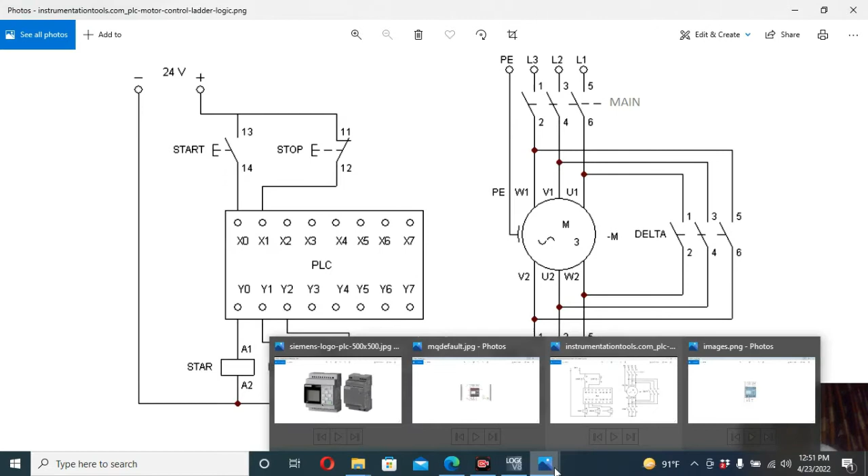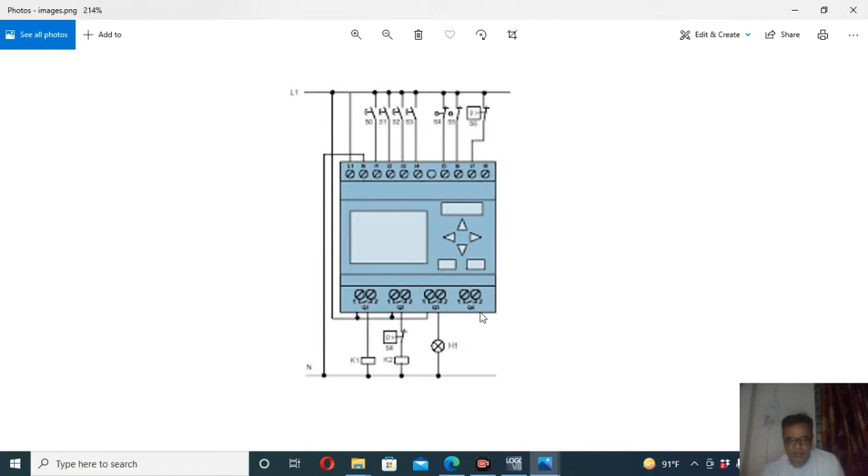These are all connecting with the common terminal and connected to the phase. And the same way for the output relay Q1, Q2, Q3, here the neutrals are all connected as common, and phases are all connected as a common to the phase supply, and all the neutral terminals that are coming here are going to the main neutral point. So this is the wiring diagram, and if I make some hardware video for the connection, you can directly watch how the hardware connection can be made.

So there are some diagrams like the previous screens. Here you see this is the PLC, and these are the inputs and the outputs, and this is the phase, neutral, this is the start, stop, the same way like the previous one, and this is the star-delta starter general arrangement. This is the motor, this is the main contact, this is the star contact, and this is the delta contact. So all the output that is coming from the PLC will be through the relay, and from the relay output it will be connected to the star contact, delta contact and the main contact, like this.

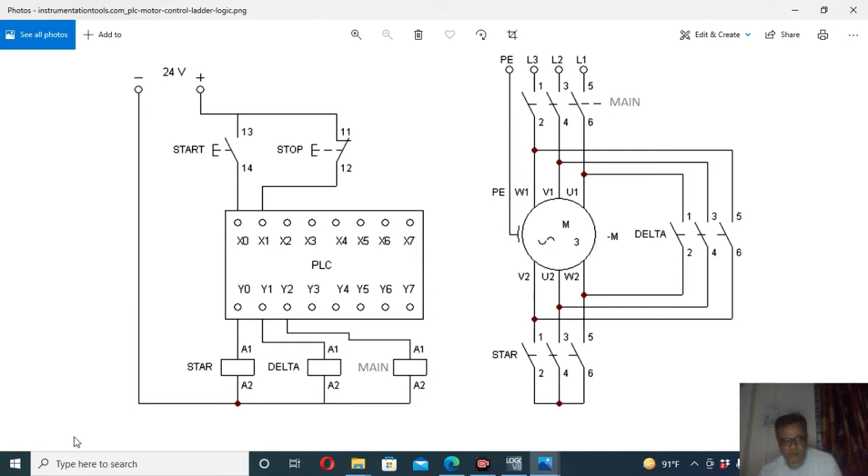So now we can watch the LOGO!Soft Siemens PLC software, and the procedure how to make the ladder diagram. The LOGO!Soft Siemens PLC, and here you see this is the title bar, and all the controls on the left hand side are displaying, like make contact, break contact, analog contact, relay coil, inverted output, and the timer, on delay, off delay, on off delay, retentive on delay, wiping. So these are all functions that are useful for the ladder diagram. They are all available here. So step by step we will use these in the ladder diagram.

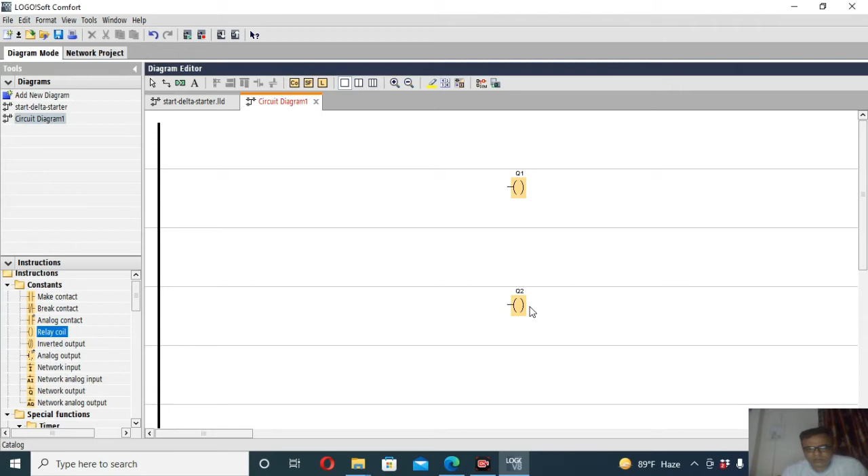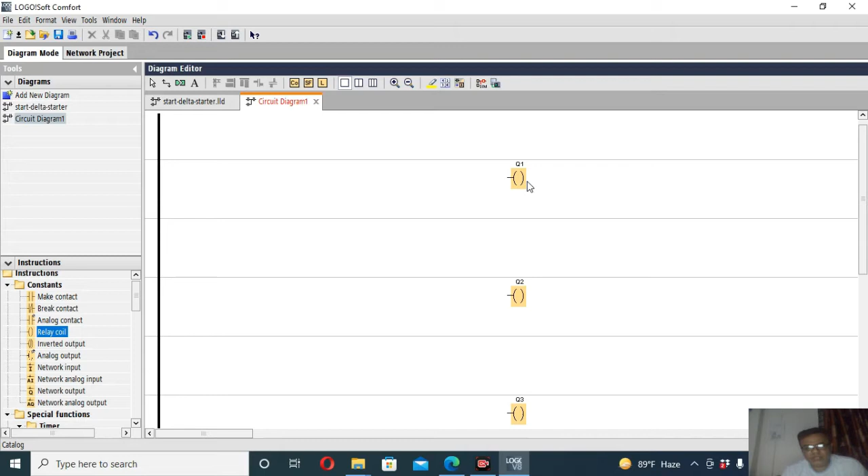So first of all, we start by relay coil. This is Q1, and another relay coil Q2, another relay coil Q3. So as in our previous discussion, we have already seen that we are using three contacts, Q1, Q2, Q3. I mean the relay coil for Q1, Q2 and Q3. These are for three main contacts, that is main contact, star contact and delta contact.

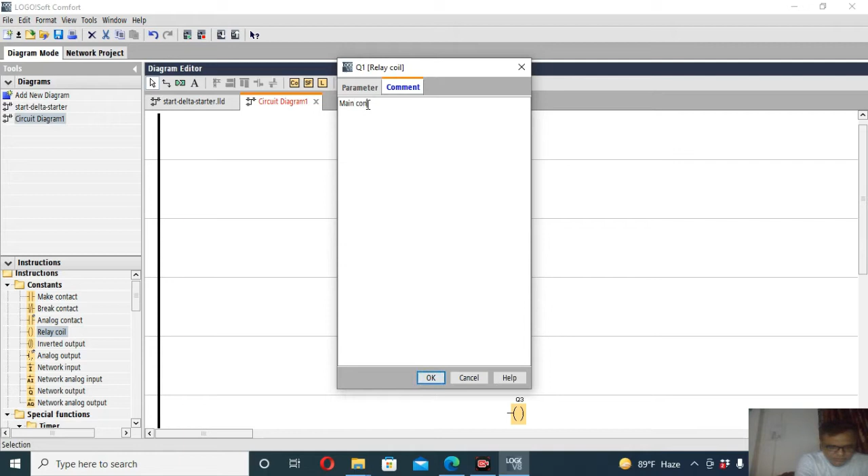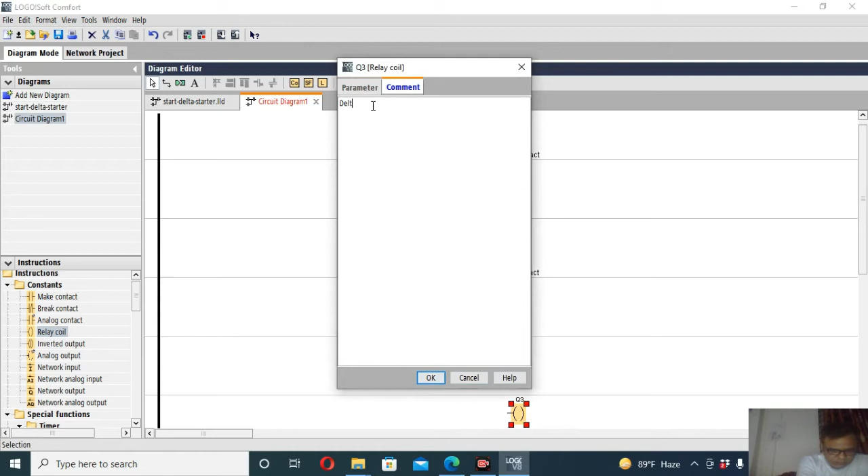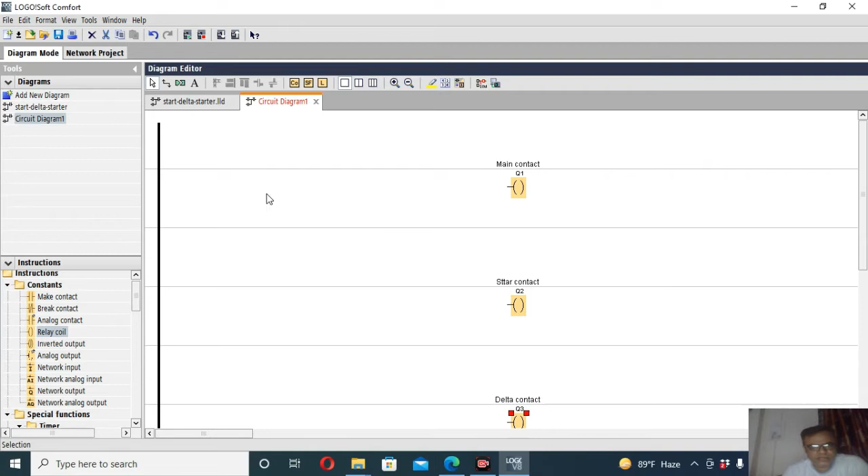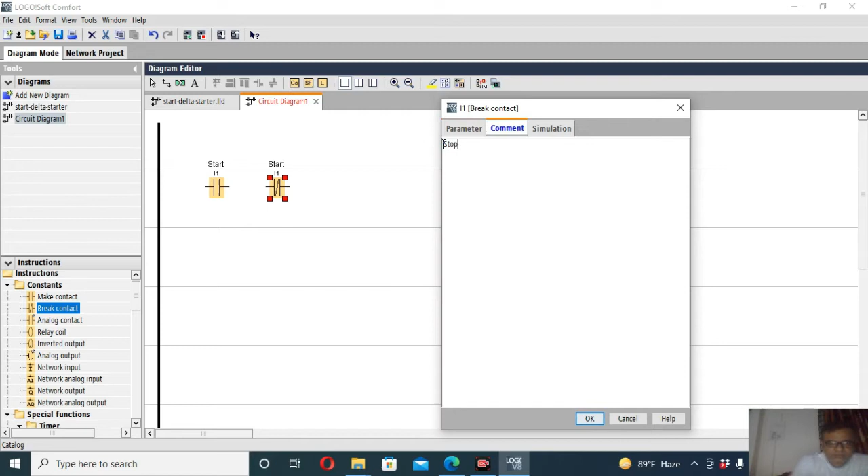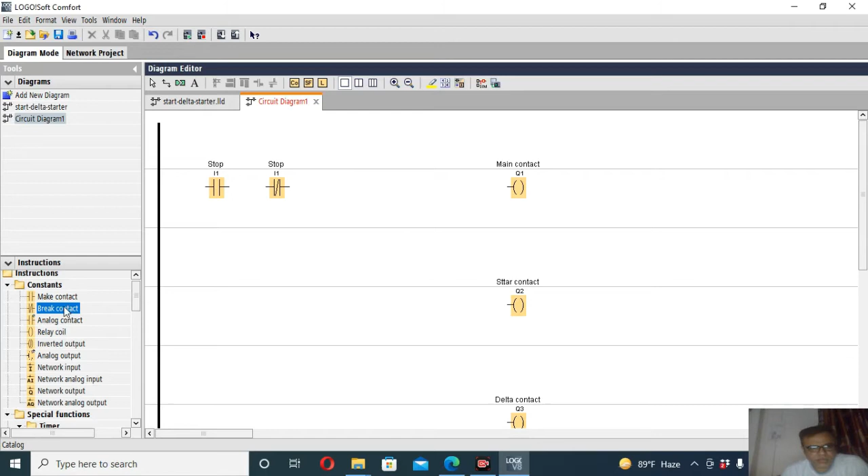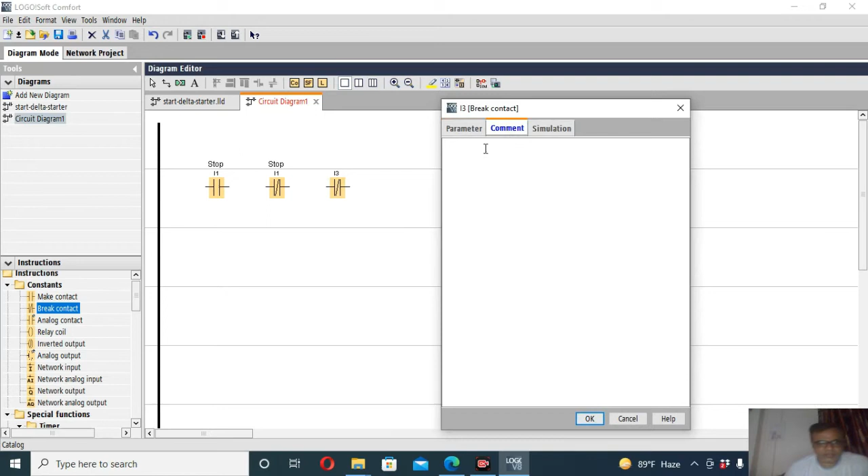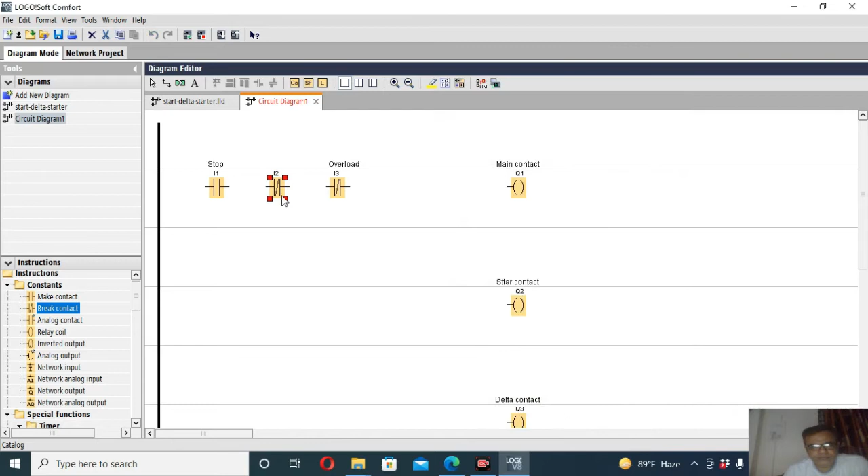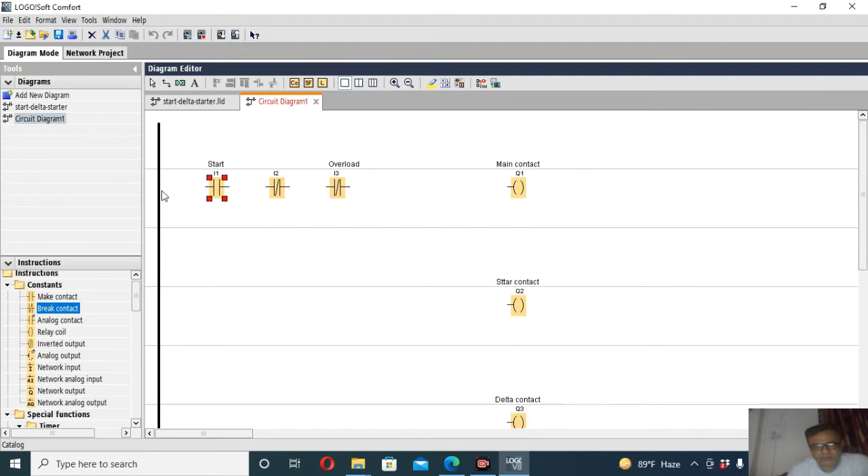So another contact can be used for overload. You can use another break contact. So you can make I3 and give name as overload. Sorry, this one should be I2, and this should be, oh sorry, the name is spelled in reverse. This one should be start button. This one should be stop.

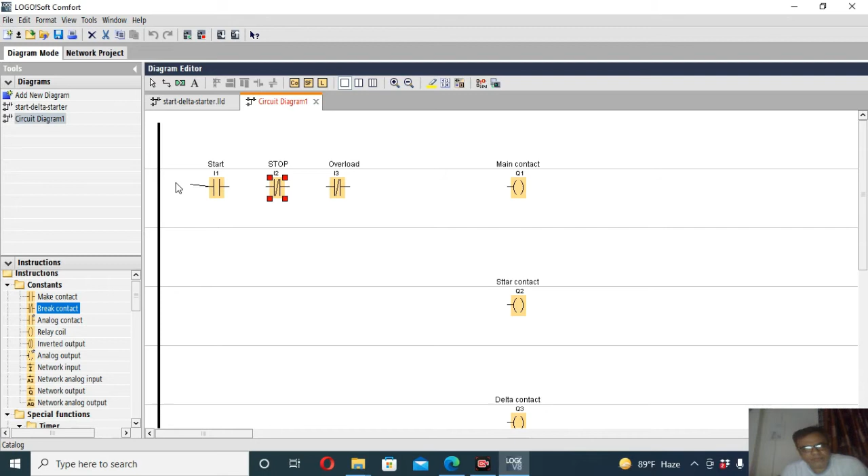So now we can take the line like this, like this, like this, and here, as this is a push button switch, if you press this contact, then momentarily it will be on, and then it will be off. And for the continuation of this contact, we have to make some latching circuit.

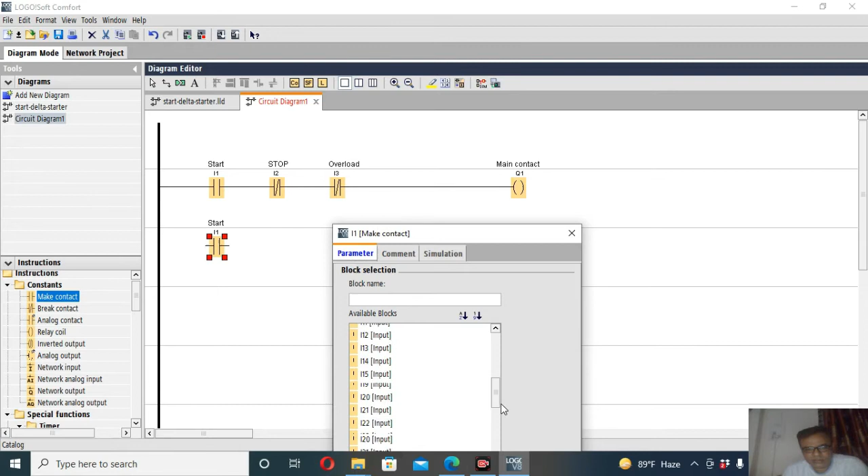So you have to take another make contact, and this is for this Q1 relay. So you have to select the make contact from the list. You see here Q1 relay coil. Okay.

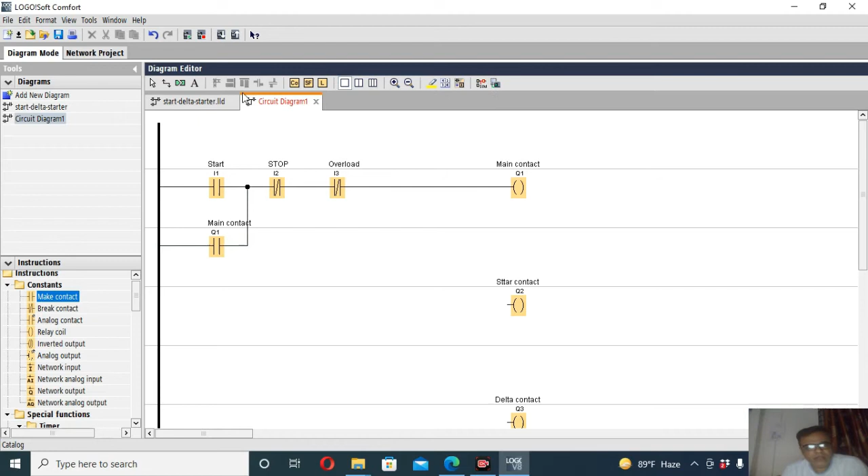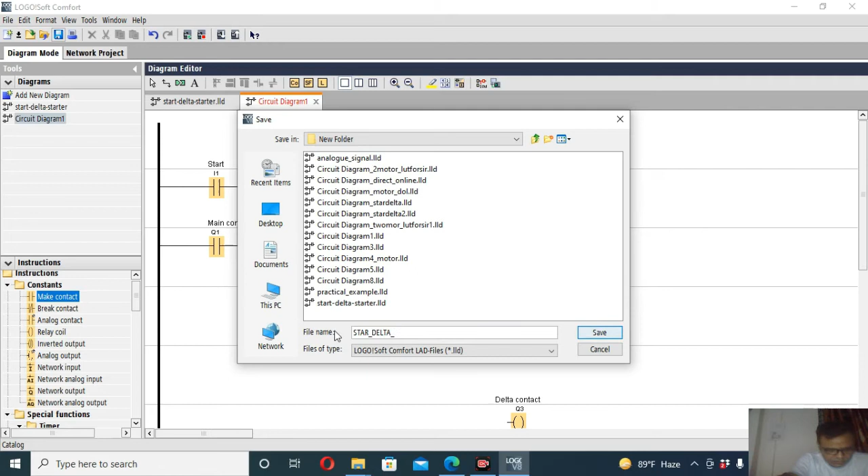So here one rung is already completed, so we can save this one and give one name as star delta logo. Then it is saved already.

So if we want to simulate this particular rung, then you can go for simulation. So this is my start button. If I press this one, I1, then you see here this main contact is already on, so this lamp is glowing. So now we have to go for another rung for the star, and another rung for the delta, like this. So this is the stop one. So if I push this one, the contact is already off.

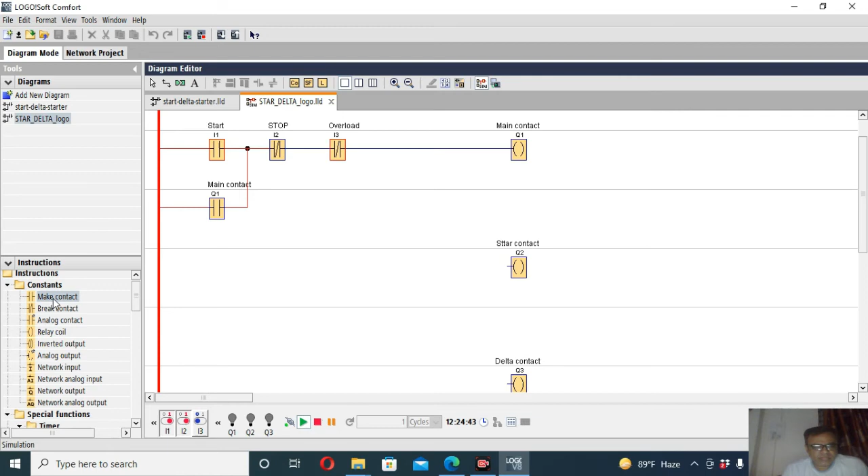So when my main contact is already running, then from the main contact we have to take one NO contact. So we have to take another make contact from here. And when the star contact is on, then obviously the delta contact can never start. So we have to take another NC contact for delta. So we have to take the break contact here.

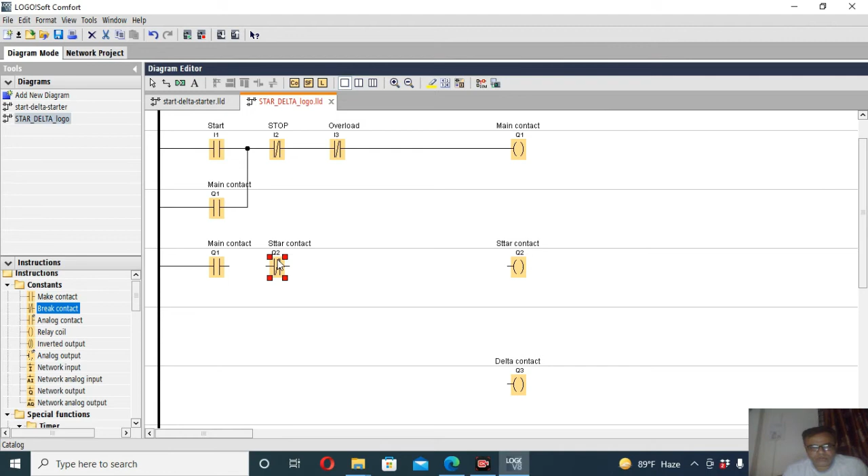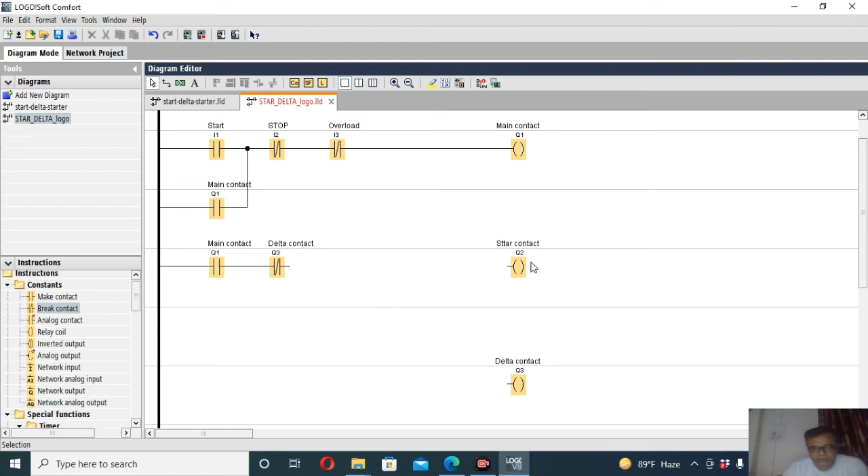Sorry, this one is Q3. So, for the timer also you have to take a timer, but the timer relay is not declared, so you have to first declare the timer relay also. So we have to take one on delay timer here. This is T1, and

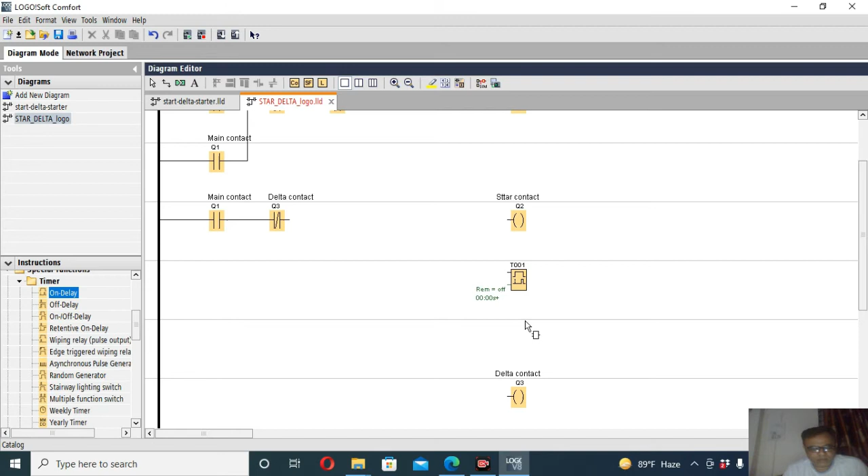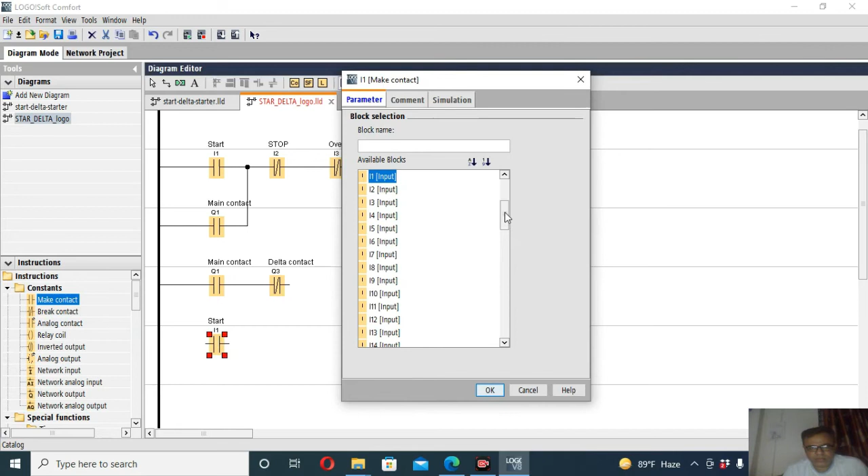for this timer operation you have to take the input from the main contact. So when the main contact is on, then my timer will start. So I have to take one make contact like this, one,

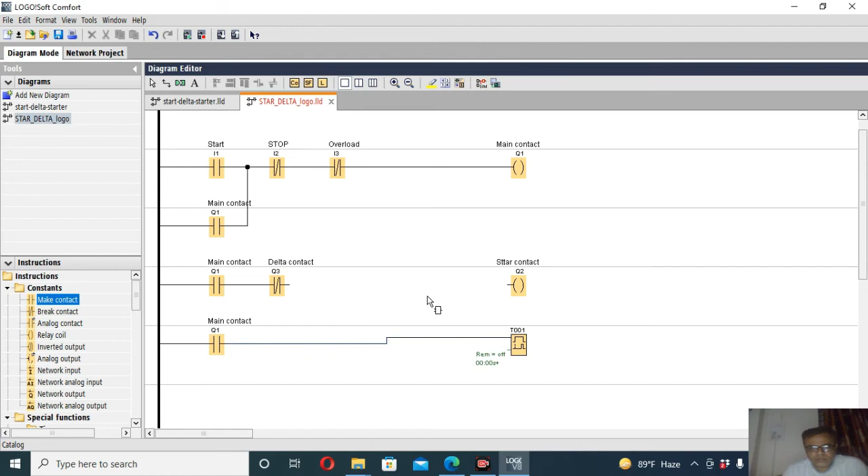then for the star contact, the timer NC will be connected with the star. So we have to take one break contact for the timer also.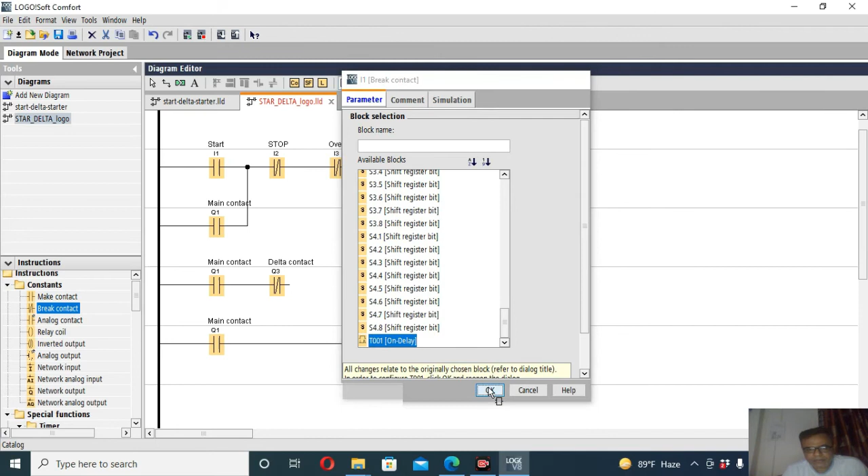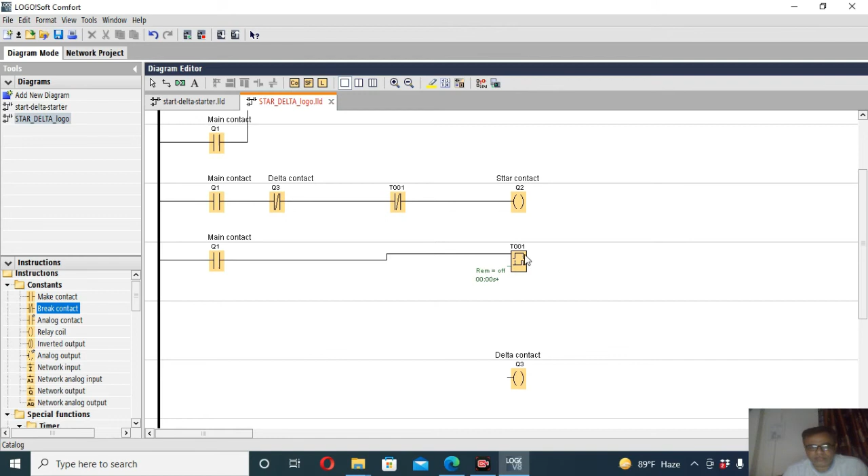And for delta, when the timer starts, I mean goes for the specified time that will be given. So you have to first specify the delay also, whatever delay you want to make, like 10 seconds. So after 10 seconds, the timer NO contact will be on, and then it will activate the delta contact. So we have to take one NO contact of the timer.

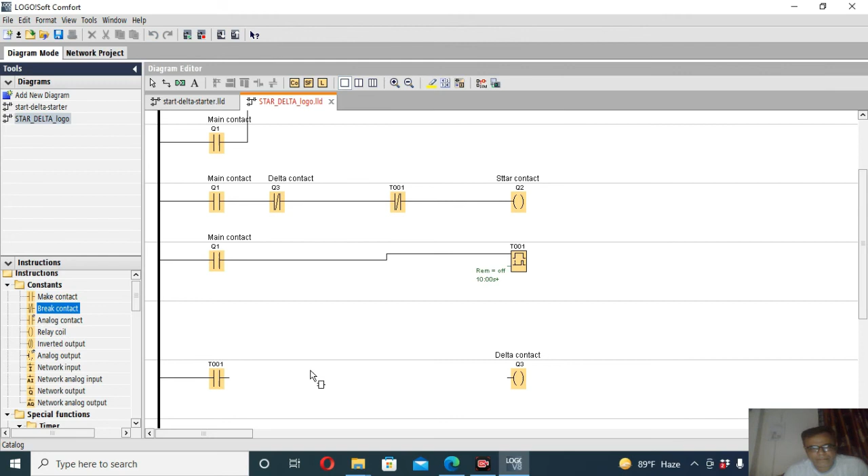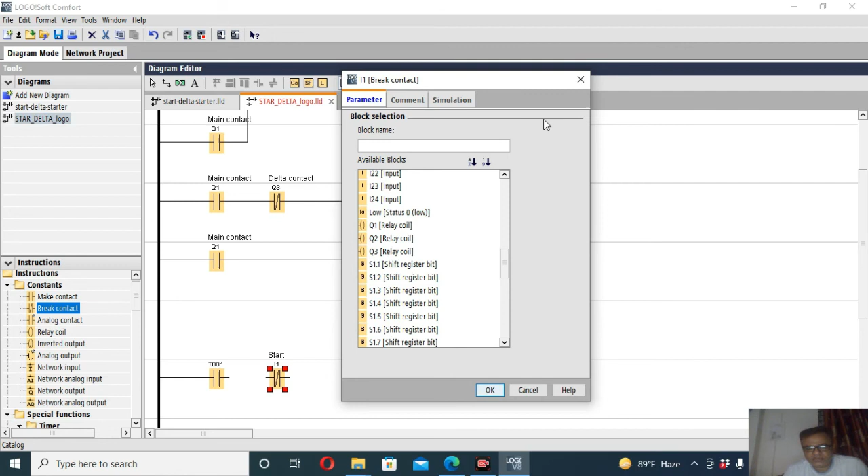Another break contact is also required for the safety of the motor starter, so that with any malfunction of the timer or the contact, it cannot operate. So we have to specify the NC of the star; the NC of the star contact is Q2. So take the NC of the star with the timer also, and you have to connect it with this delta.

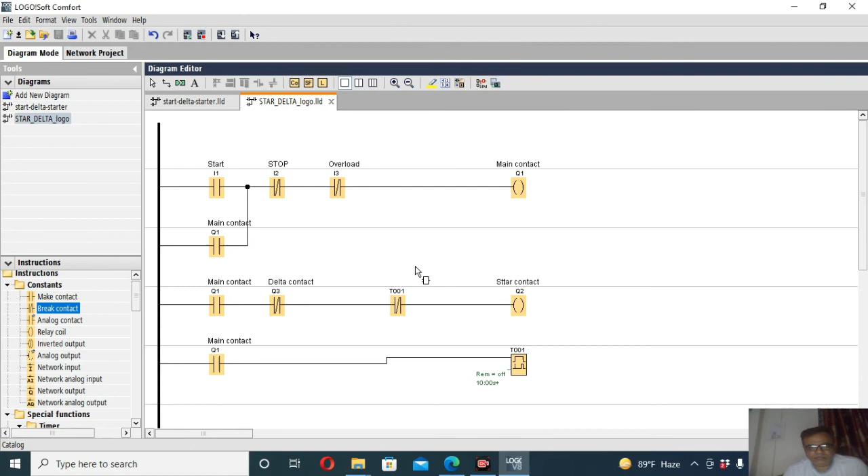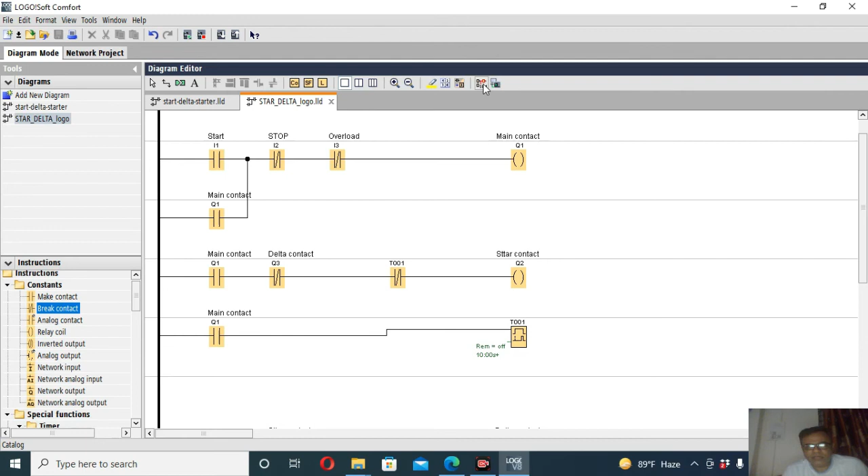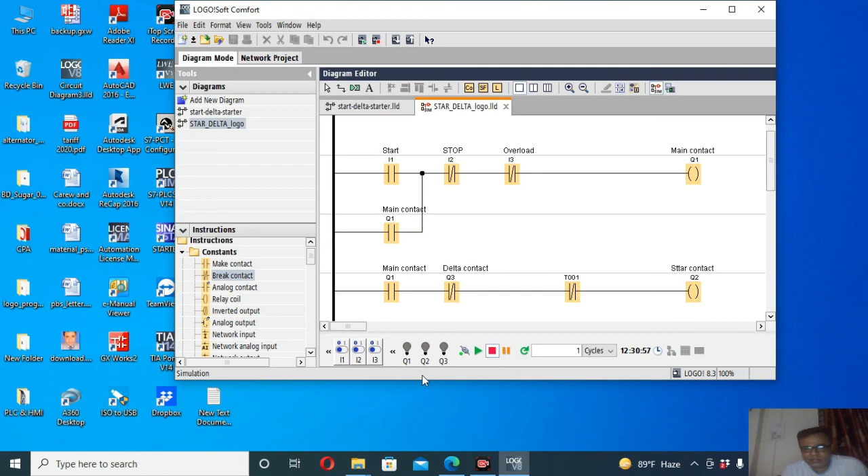So now you can save this project, and this is the option for the simulation. If we start the simulation, you can watch the output and the input by simulation. So if I start simulation, the previous program was running, that's why you have to reset that one. And now if we press the start push button I1, then it is not working. That means there are some problems. So let's check it out.

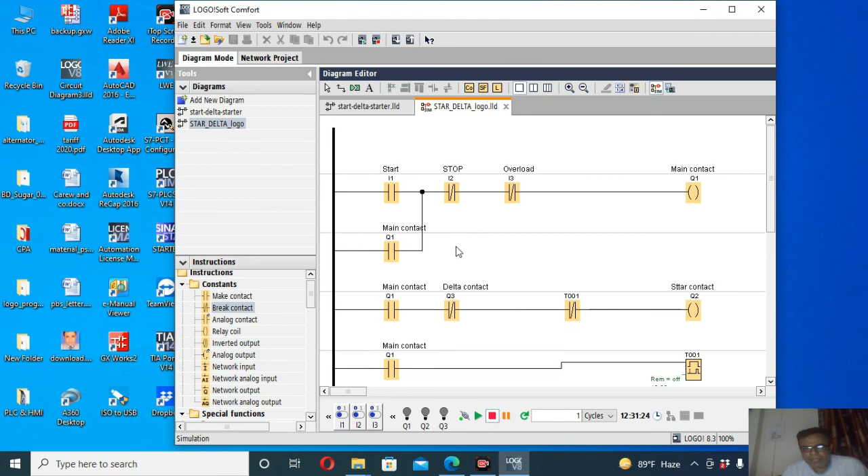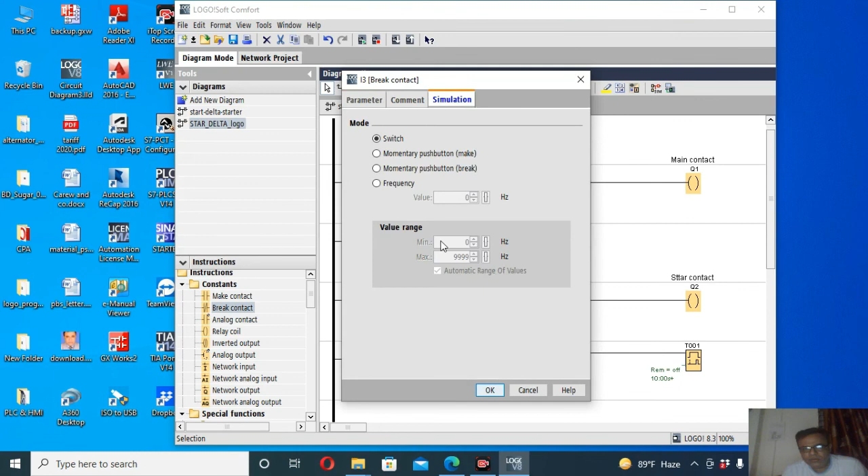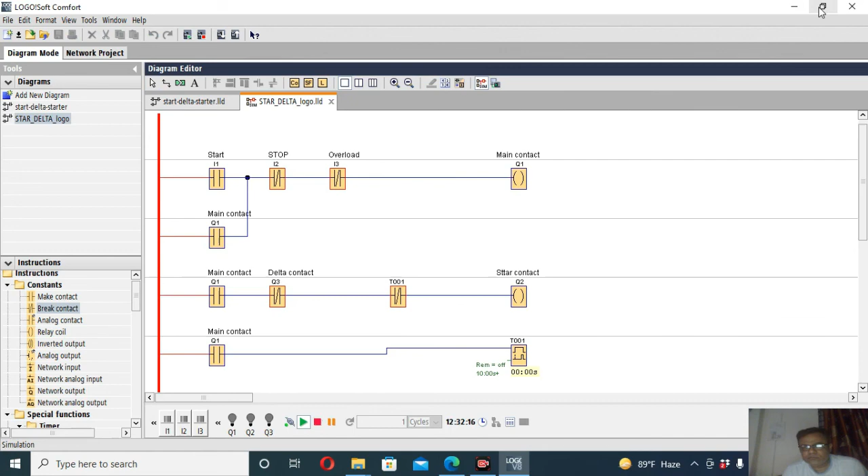This should be a momentary push button. Momentary push button. This should also be a momentary push button. Save this one and go for simulation. So here you can see Q1 and Q2. The main and star contacts are on and this timer is running, and after that the star contact is off and the delta contact is on. So this is the simple example for the star delta starter circuit.

And for the star delta starter, there is not that much use for a PLC, but the PLC has its own advantages, because there are some protections that a star delta starter cannot give, but a PLC can give, like any temperature, any vibration, or any failure of contact. For these kinds of problems your starter cannot give you protection, but the